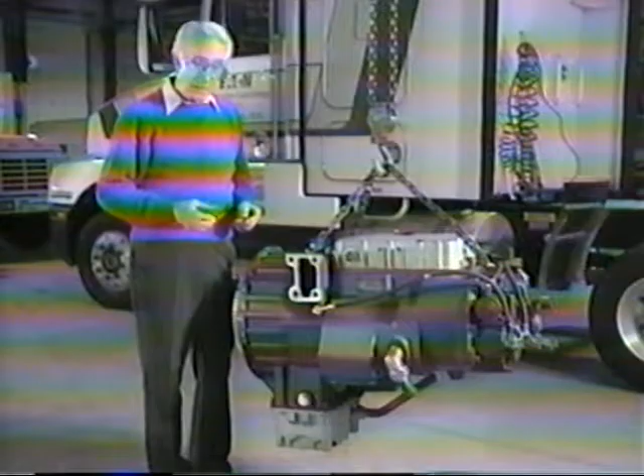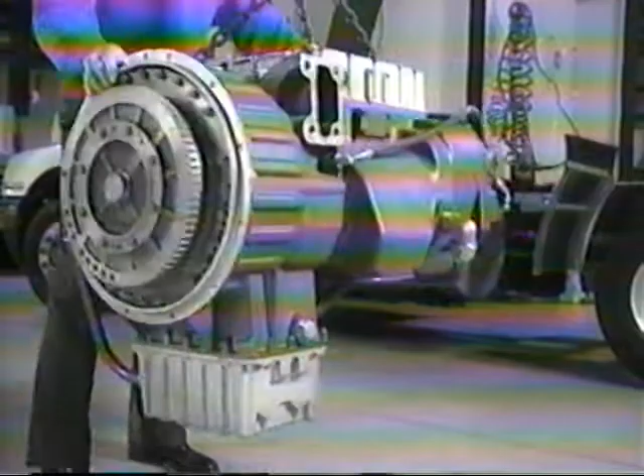The first system we want to talk about is the hydraulic system. Simply put, it replaces the clutch. Hydraulic system components include the hydraulic pump, the torque converter assembly, which houses the interrupt and lockup clutches, and hydraulic valves. It works like this.

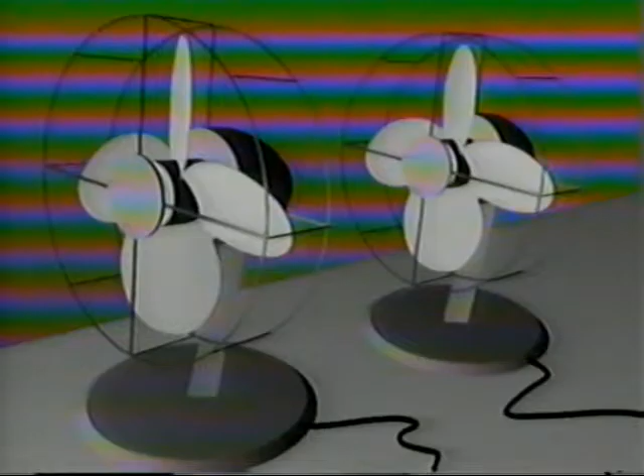In the hydraulic system, the torque converter transfers power from the engine through a viscous or fluid coupling. Compare this action to two household fans. Airflow from the first fan spins the blades of the second fan.

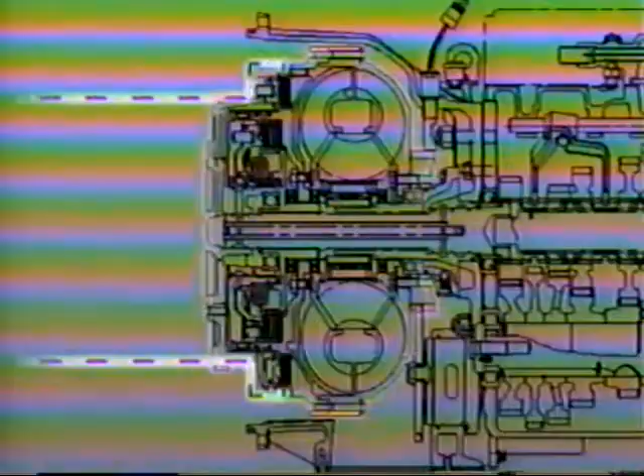Now, the interrupt clutch connects the torque converter with the transmission input shaft and has the same function as the master clutch on a non-automated transmission. Whenever the truck is running over 12 miles an hour, a lockup clutch bypasses the torque converter, so engine torque is coupled directly to the transmission input shaft. This provides maximum efficiency. Now, you need hydraulic pressure to operate the transmission.

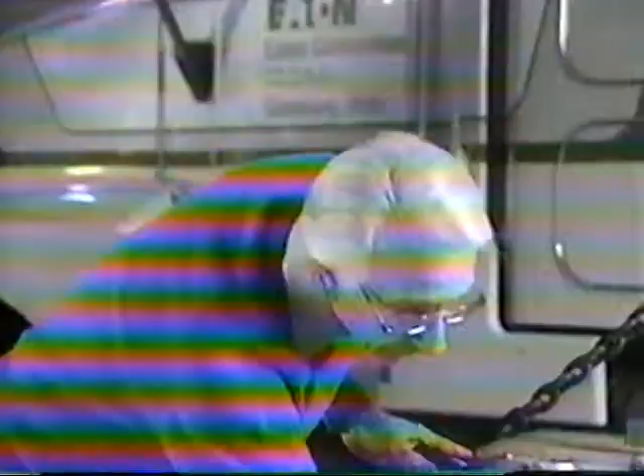A hydraulic pump geared to the torque converter supplies pressurized fluid to the hydraulic valves. The valves, which are controlled by the ECU, operate the interrupt and lockup clutches and direct lubricating fluid to all transmission components. The hydraulic valve also contains pressure regulators to control hydraulic pressure throughout the system.

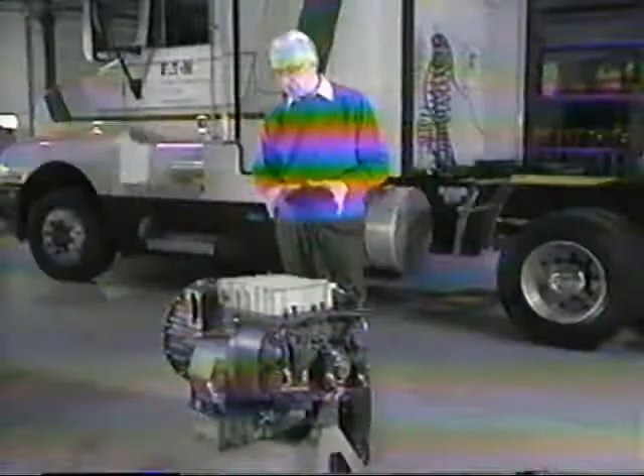The CEEMAT pneumatic system synchronizes and shifts the transmission using the truck's air system. It includes the auto shift module, synchronizer system, and range system. Now, the auto shift module replaces the conventional gear shift lever. Two side-by-side solenoids mounted on the auto shift select the correct shift rail. Fore and aft solenoids, also mounted on the auto shift, select the correct gear.

The CEEMAT synchronizes the transmission using solenoids mounted under the ECU cover, and one of two methods, depending on whether the transmission is operating with a mechanically governed engine or an electronic engine. This is how it works.

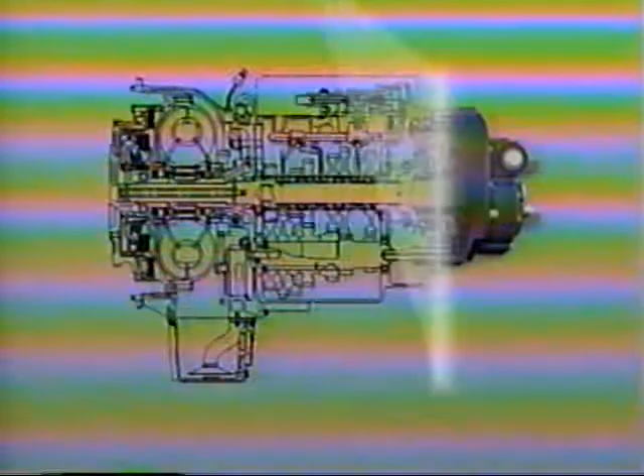During downshifts with mechanically governed engines, you need to increase the speed of the front countershaft. The CEEMAT uses a power synchronizer to do this. You see, the power synchronizer is splined to the front countershaft. Using its band clutch, power is directed through the power synchronizer's planetary overdrive transmission to speed up the front box countershaft.

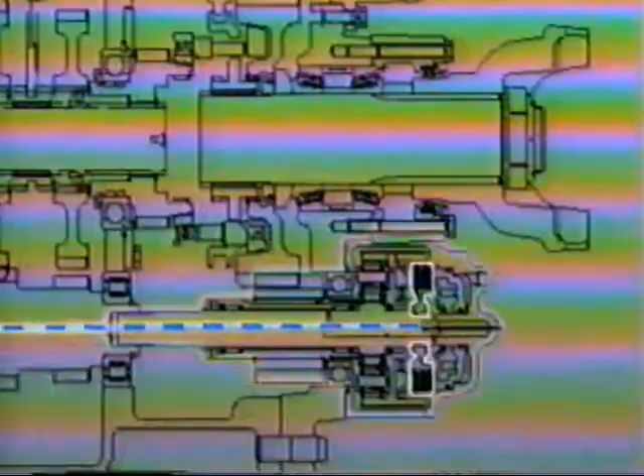This power synchronizer assembly also includes brake discs that slow down the countershaft during upshifts. The ECU pulses air pressure to the disc brake, momentarily grounding the countershaft to the transmission case. Pulsing the air pressure is like pumping the brakes. It slows the shaft gradually rather than locking up completely.

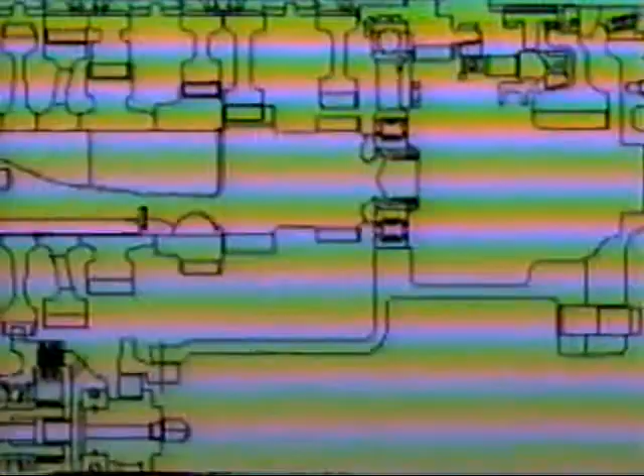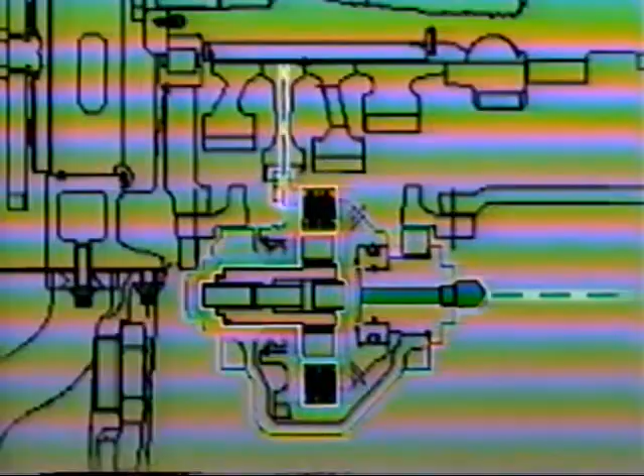Now, CEEMAT transmissions can communicate directly with electronically controlled engines, which means they don't use a power synchronizer. They have an inertia brake instead. The inertia brake is geared to the front box countershaft. To slow the countershaft during upshifts, the ECU pulses air pressure to the inertia brake disc pack, slowing the countershaft, the same as the power synchronizer disc brake.

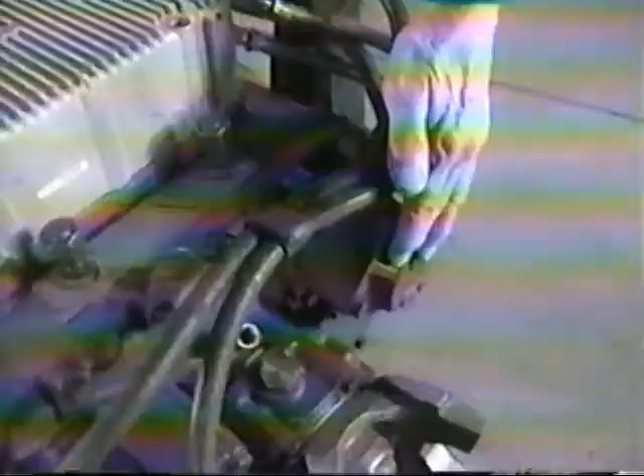For downshifts, the primary difference with the electronically controlled engine is that no separate device is needed, because we can boost the engine, which speeds up the front box countershaft. Finally, the range system pneumatics are controlled by a slave valve mounted on the ECU and operate the range shift mechanism, which is identical to a non-CEEMAT Road Ranger.

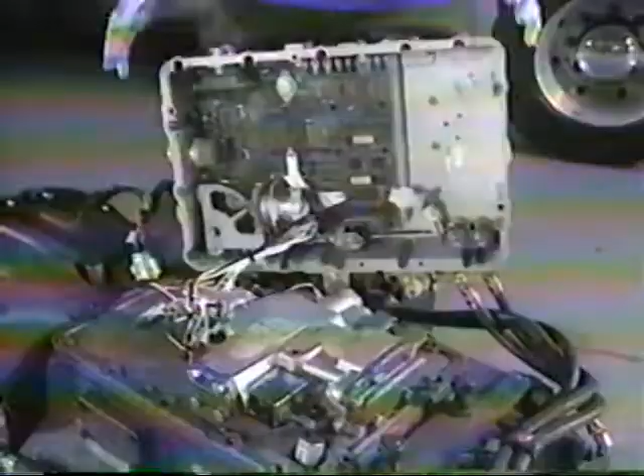The third CEEMAT system is the electronic system. This system selects the best time and the best way to shift, and monitors and controls the hydraulic and pneumatic systems. Its specific components include the electronic control unit, or ECU, sensors, torque converter harness, auto shift harness, and vehicle interface harness. Now, these are the components of the electronic system, but you should be seeing the way the three systems relate at this time.

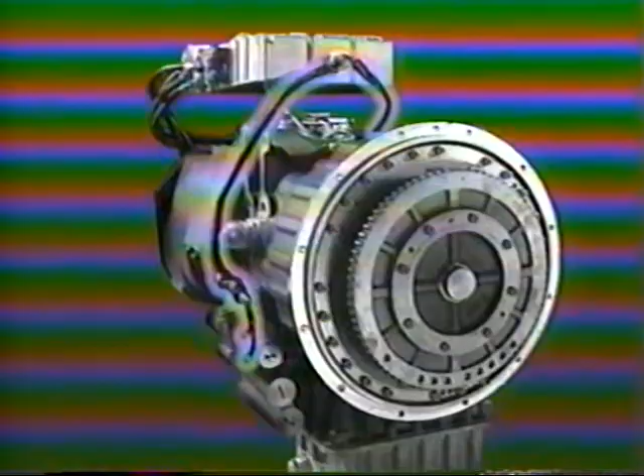For instance, the torque converter harness is the connection between the ECU and the hydraulic section. The torque converter harness carries output signals from the ECU to the hydraulic valves. Remember, these valves operate the interrupt clutch and lockup clutch, part of the hydraulic system. And the torque converter harness carries input signals coming from the engine speed sensor.

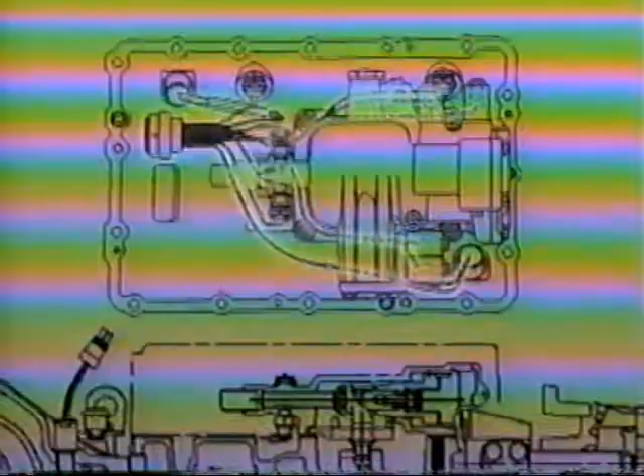The auto shift harness also carries input and output signals. There are two types of input on the auto shift harness. The first input is from the ball switches, which signal the current gear position to the ECU from the auto shift and the range shift.

The second type of input is transmission shaft speed. Two speed sensors mounted on the shift bar housing signal input shaft and output shaft speeds. The auto shift harness outputs are to the four solenoids that control the auto shift module.

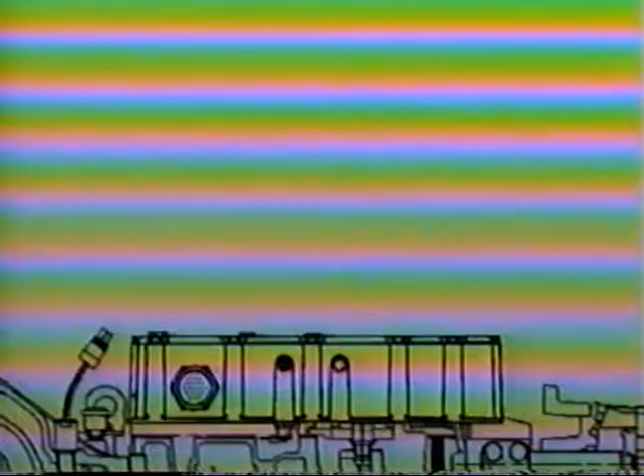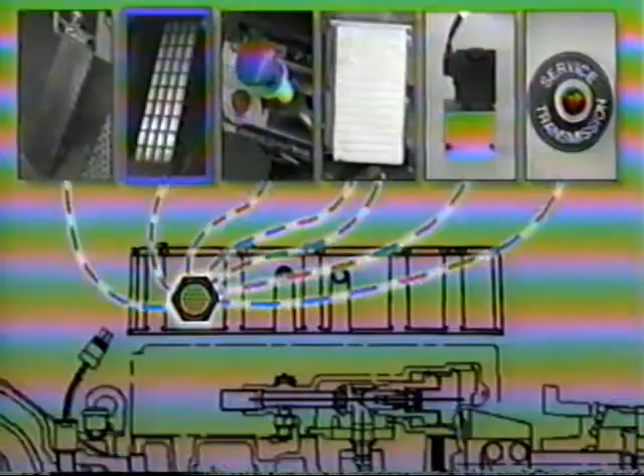The vehicle interface harness connects to other inputs and outputs that tie the transmission to the rest of the vehicle. For instance, the input signals from the service brake and the throttle position sensor are on the vehicle interface harness. And the ECU outputs signals to the throttle control solenoid and to the service transmission light through the interface harness. And when coupled with an electronically controlled engine, the communication between the CEEMAT and the engine is through the vehicle interface harness. The ECU controls all three systems: hydraulics, pneumatics, and electronics.

Now let's look at how CEEMAT brings together these three systems and their corresponding components to complete a shift. Again, the CEEMAT transmission does the same thing a driver would do: declutch, defuel, synchronize, select a gear, reapply the clutch, and refuel. But here's how the CEEMAT does it.

When the ECU determines it's time for a shift, the interrupt clutch is disengaged by releasing hydraulic pressure in the hydraulic valve. Engine speed is decreased using the defuel solenoid on mechanical engines or using the communication link on electronic engines. The auto shift pulls the front box into neutral. The ball switches confirm that the front box is in fact in neutral.

The synchronizer system, meaning the power synchronizer disc brake on mechanical engines and the PTO-mounted inertia brake on electronic engines, manipulates the speed of the front box countershafts to match engine and driveline speeds. When input and output shaft speeds reach synchronous, the four solenoids mounted on the auto shift select the correct shift rail and gear position. The ball switches provide feedback to the ECU that the proper gear is engaged.

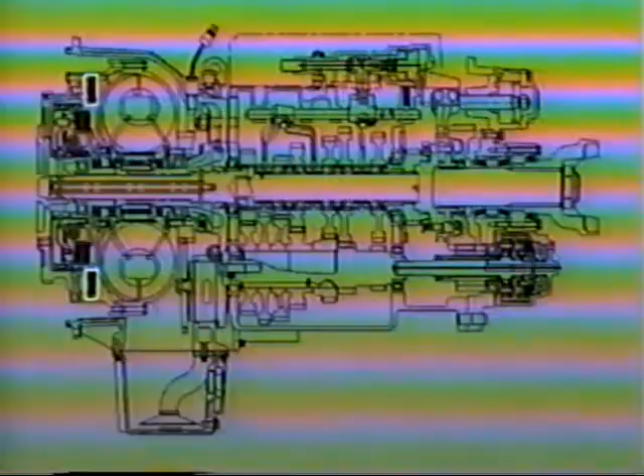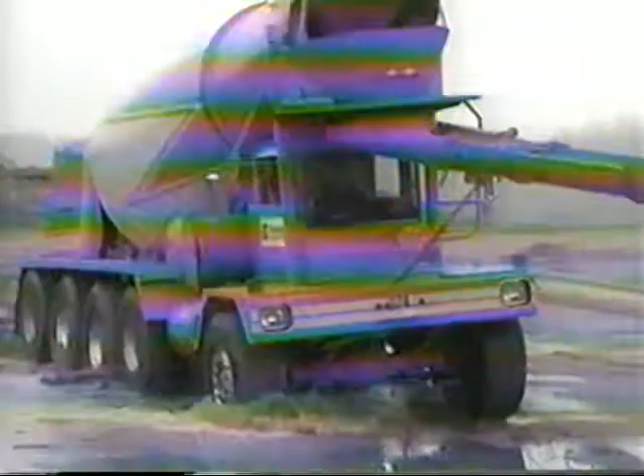Remember, during downshifts, synchronizer operation is different. On mechanically controlled engines, the ECU doesn't increase engine speed. Instead, the ECU operates the band clutch in the power synchronizer to speed up the transmission countershaft speed to match engine speed. And on electronically controlled engines, the CEEMAT ECU signals the engine control computer to increase engine speed during downshifts, just as a driver would do on a non-automated transmission.

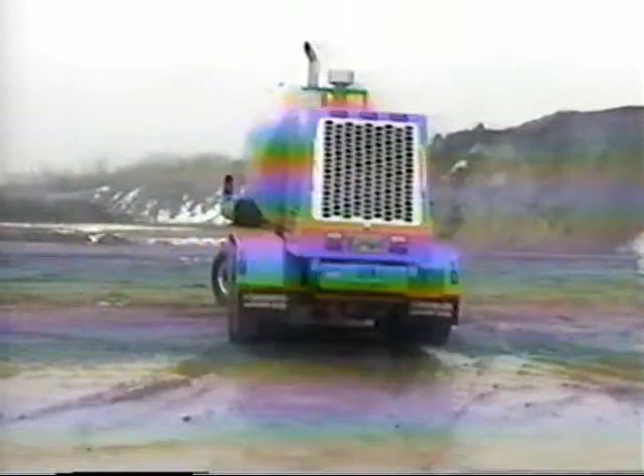CEEMAT does everything a driver would do using a manual transmission, but in a fraction of a second. And with the CEEMAT, all the driver has to do is release the brake and hit the throttle. Let's take one more look.

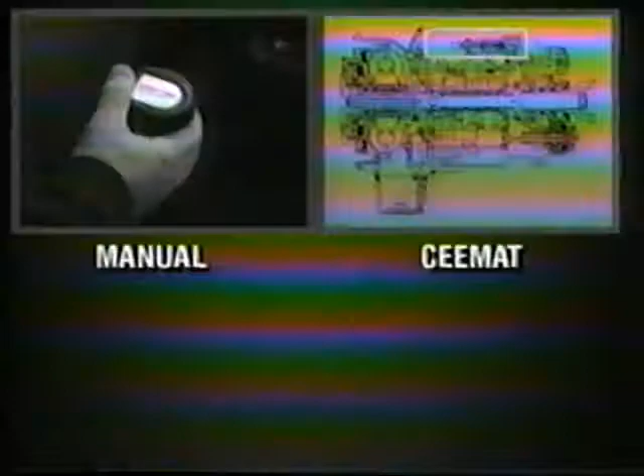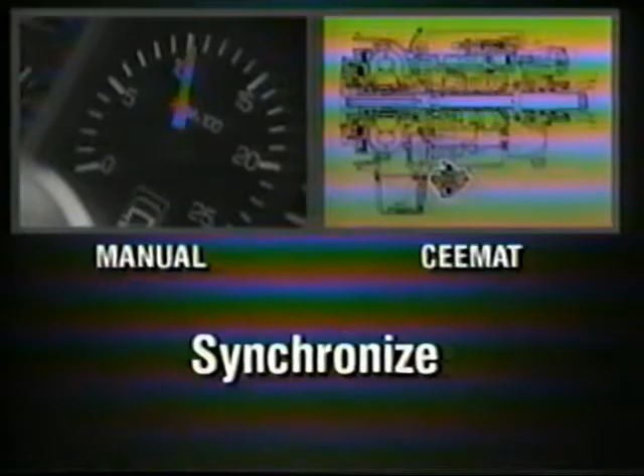During both the manual and CEEMAT shift sequences, the transmission has to declutch, defuel, synchronize, select the gear, reapply the clutch, and refuel. But again, the CEEMAT does it in a fraction of a second.

For a different look at CEEMAT operation, your workbook includes graphs and detailed information. You'll also find the other tapes in this series useful. Driver instruction will show you how to operate the CEEMAT in various real-life applications and will highlight some special features. The diagnostic and troubleshooting tapes will show the specific procedures to follow in pinpointing the cause of any malfunction.